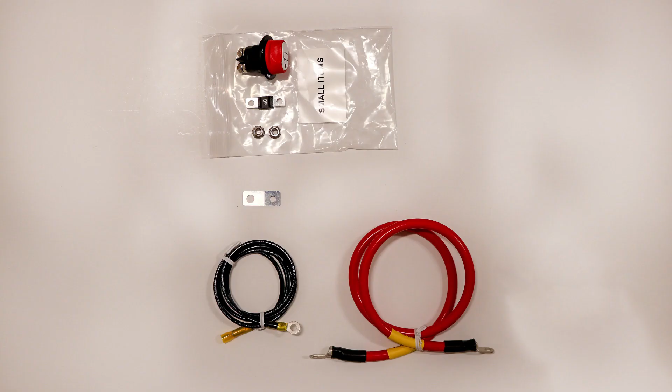In your electrical kit, you're going to have a small box that's your first step in the install process. This contains a few components: a black negative ground connection wire, a short red positive connection wire, and a small switch with a fuse included. We'll move into later the more specifics on how these all get installed.

Your second box is going to be the wires that we're actually going to run under the van. This pulls power from the seat base all the way back to that fuse block behind the wheel well. Your third box is your fuse block and all of your fuses, all the components to make the connections from your wiring harnesses that run power to all your components to your fuse block.

Your fourth box is going to be all of your end connections. This is all done after the wiring harness is installed and hooked up to the fuse blocks. This will be your very last step.

Your main wiring looms are going to be in the actual wiring harness box. You're going to have 4: the white and the blue run to your passenger side connections, and the black and the orange are your driver's side connections.

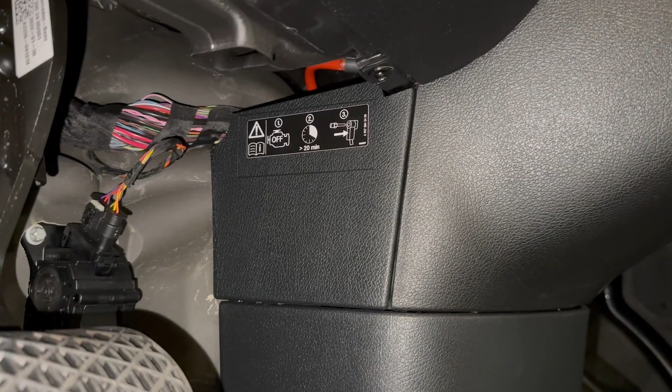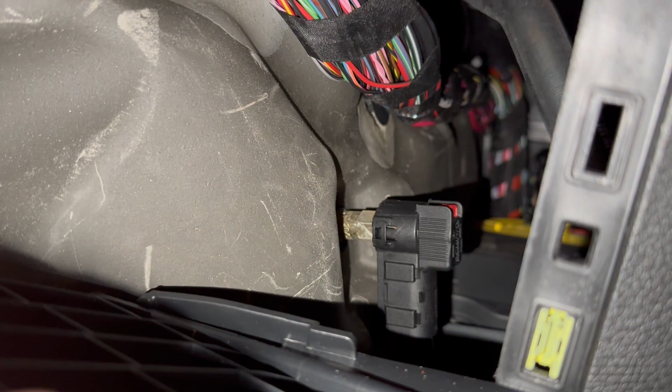The first and most important step of our wiring harness install is to disconnect the main ground for your van. This cuts power to all of the electrical connections that we're going to be messing with under the seat, making sure you're operating safely and not throwing any codes or creating issues with the electrical of the van.

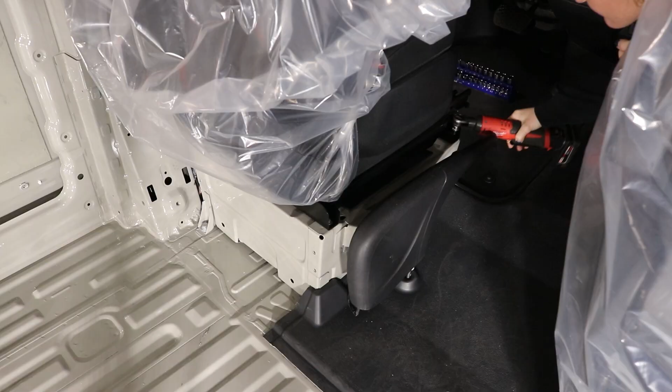This connection is housed under the driver's seat right up next to the gas pedal. There's a little cover you can pop off and then disconnect it using that red button on the top of the ground post. Once you have that ground disconnected, we're going to want to remove our driver's seat.

There are 4 bolts, 1 in each corner. You might have to move the emergency brake if you have one, or get a different socket size depending on which connection you're undoing, just because the seat can kind of be in the way. A good tip is if your seats are on swivels, you can move the seat out of your way to make it a little easier for yourself.

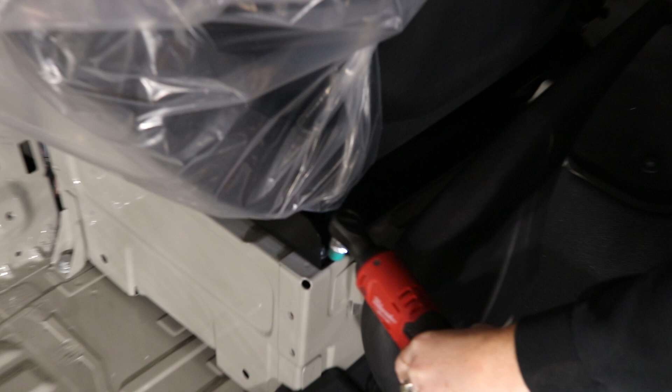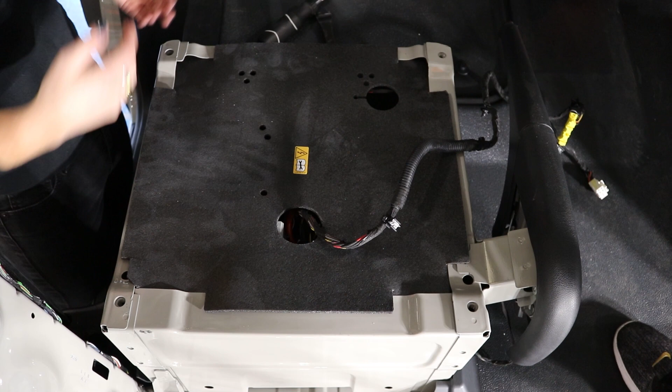Once you have your bolts removed, you're going to want to disconnect the 2 wires from under your seat that connect to the main wiring harness in that seat base. This will allow you to remove the seat safely. You can see here we've got them disconnected—they just have some little factory clips that hold them in.

Then you want to set those to the side and remove this little padded cover that's over all of the connections under the seat base.

Once you have full access to the seat base, we're going to want to move this connection bar out of our way. There's just a screw in each side that you can undo and shift that. We usually shift it towards the back of the van, kind of up and out of the way, to give us access to the connections underneath.

I like to always put my hardware back in the holes that they came from so that I know exactly where they are and I don't lose them. Otherwise, you can just keep a little cup on hand to keep all of your hardware safe and in one spot.

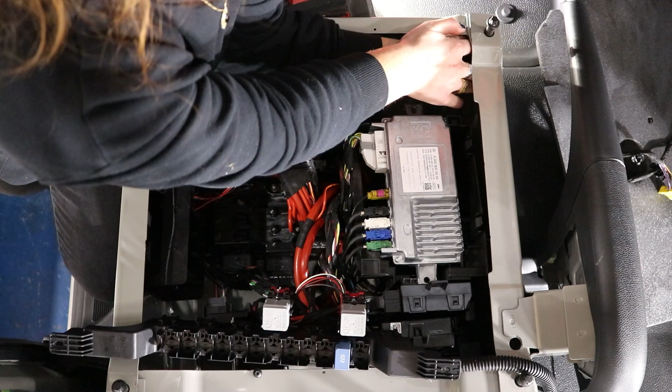We're going to move on to removing the little 12-volt outlet on the passenger side of the seat base. We're going to replace this with a switch. There's a couple plastic tabs on the back side of that outlet that need to be engaged to remove it. This can be a little tricky.

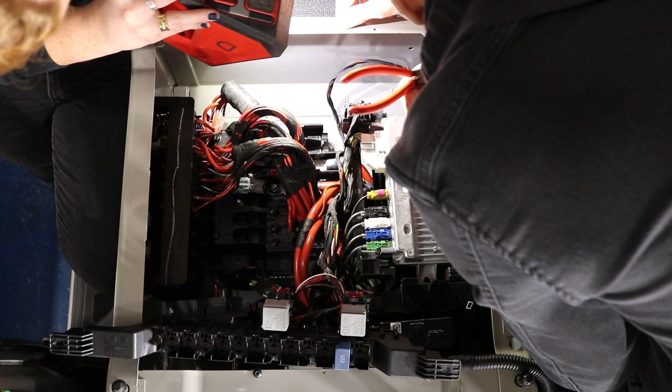We're not going to be reusing this outlet, so if you do end up causing damage to it, don't worry about it too much. Once you have it removed, we're going to open up that hole a little bit.

You just need to open it up by about 1/8 of an inch or so to allow our switch to fit into that hole. You're going to want to use a large step bit to make this hole.

Once you've test fit your switch, you can go ahead and deburr the hole and apply rust prevention.

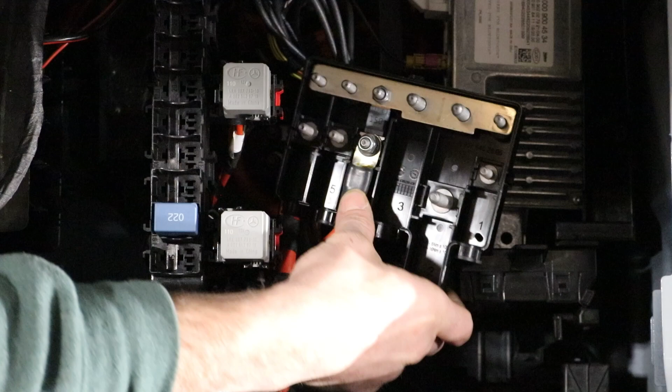We want to make sure to treat that exposed metal so you don't have any rust form down the line. The first thing we're going to show is the connection to an auxiliary battery. This is only if you have a factory auxiliary battery. If you don't, you can skip past this part to the section where we connect to the main starter battery. But if you have an auxiliary battery, you'll have a little housing for a bus bar underneath your driver's seat base, which we show here.

You can pop that out of place, and then there should just be some plastic retaining clips for the cover on that, and you can pop that off. Then you can see here there's a connection on the far right side, and there's usually a factory fuse already, but there will also be an 80 amp fuse in your electrical kit that you can use.

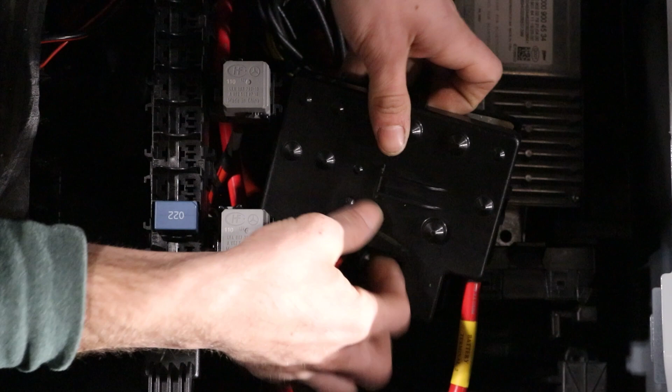So you're going to connect that to the far right post, and then using the cable that comes in your battery connection box - there's a 4-gauge cable labeled battery terminal on one end and seat base switch on the other - you connect the battery terminal end to the other end of that 80 amp fuse and tighten down your nut. After that, you can reconnect the cover to that bus bar and position it back into place in the seat base where you found it.

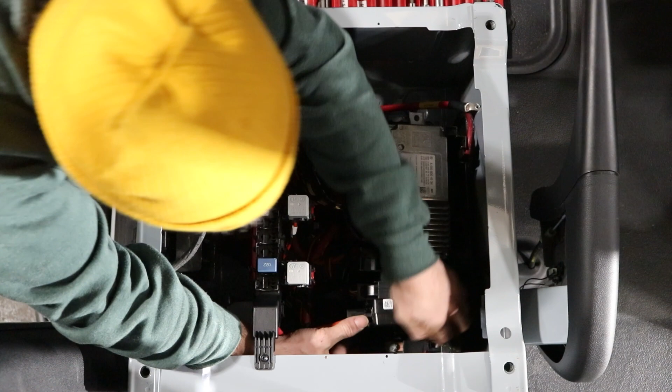After that connection's complete, take the other end and route it to the forward right-hand side of your driver's seat base, and we'll connect that to the switch a little later on.

If you don't have a factory auxiliary battery, we've provided all the parts to connect to your main starter battery for the van. Note that this is not approved by Mercedes, but it is the only way to hook up to your main van power to power the rest of your kit.

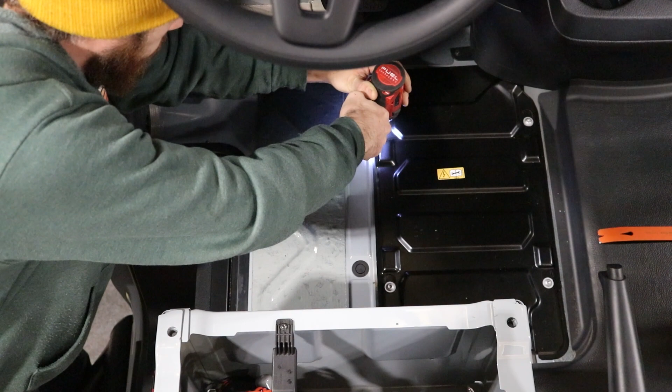To do this, we're going to go underneath your driver's seat footwell and remove that rubber cover first to gain access to the battery. Once you've done that, you're going to want to remove 4 bolts for the cover plate and make sure to put those in a safe place.

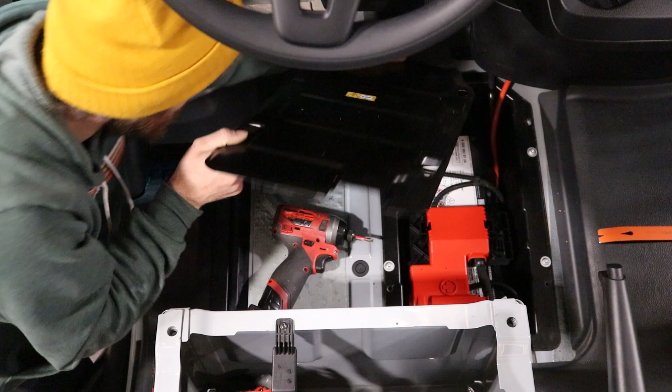I like to put them back into the holes they came from so I don't lose track of them. Once you've done that, the battery will be exposed, and there's a little housing on the positive side of the battery. You can see here we pop it out of place. This is going to be another protection from Mercedes.

This has a cutoff from the factory so that you don't drain your battery all the way down connecting anything to it. You still want to be really cognizant of not using too much power because it will drain it pretty low, but it will cut off power to your kit before your main battery is totally dead.

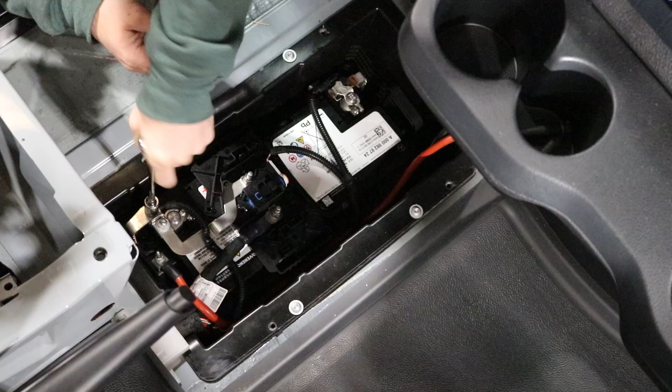Once you've located that housing, you can disconnect it from the main battery and pull it out. You're going to use that same cable you would have used if you had an auxiliary battery and that 80 amp fuse as well. We've put it onto a bench here so it's a little easier to see.

Once you've removed the plastic housing from the main battery, we're going to install a shunt, which is basically going to allow us to transfer power off of that main bus bar to another post. The shunt comes in your battery connection kit from Adventure Wagon, and there will be 2 holes in it. The sizing of the hole determines which orientation it goes, and it's going to be right next to a 125 amp MIDI fuse from Mercedes.

Once you have your shunt in place, you want to tighten down the nut on the main bus bar and then connect the 80 amp fuse to the other side, which connects power from the shunt to our cable. After you have the 80 amp fuse in place, connect the battery terminal side of your 4-gauge cable from your electrical kit to the other side of that 80 amp fuse. There will be a little spot in the plastic housing that routes where that wire will be.

That's a good tell that you've got everything in the right spot. After you have everything connected, you want to tighten down all of your nuts and make sure those are nice and secure. Then we can reinstall this housing back onto the positive terminal of your battery.

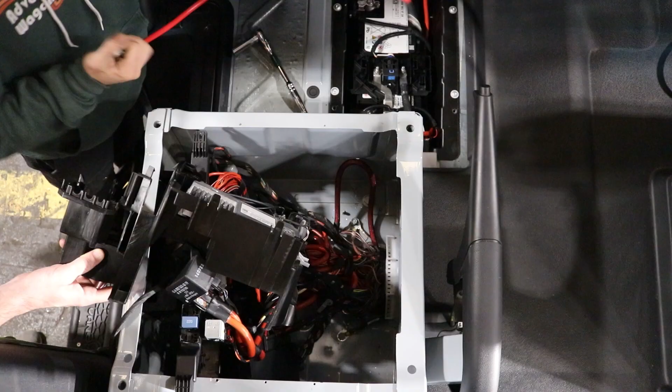After you have the battery all reconnected, you can put back on the cover plate, and then route your cable underneath your driver's seat base. There's a plastic housing on the right side of your seat base that can be removed if you're having trouble getting the cable inside. You need the other end of that connection cable to end up in the forward right-hand corner of your seat base. There's a factory outlet there that we're going to replace with a switch to connect to the rest of the kit. Now we're going to move on to installing our switch and making those connections.

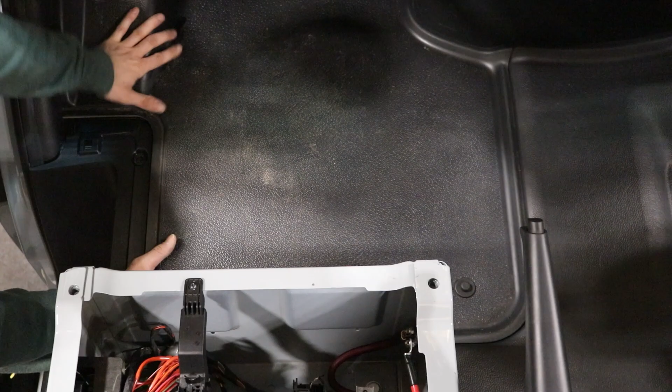Which post you're connecting to here doesn't matter. This is just an on-off switch for our positive connections. You don't have to tighten this down all the way yet either. Having it a little bit loose and allowing yourself some wiggle room in terms of the wire placement is kind of nice once you've got it installed. Then we can tighten it up all the way once everything's in there and connected.

Put that wire through the hole that we made in the side of the seat base and thread that collar over the wire, then reinstall it to the back of the switch. This is going to secure it to the side of the seat base and keep it from going anywhere. We found that having the wire come towards the back of the van off that switch is the easiest. We're going to have both connections actually run in the same direction.

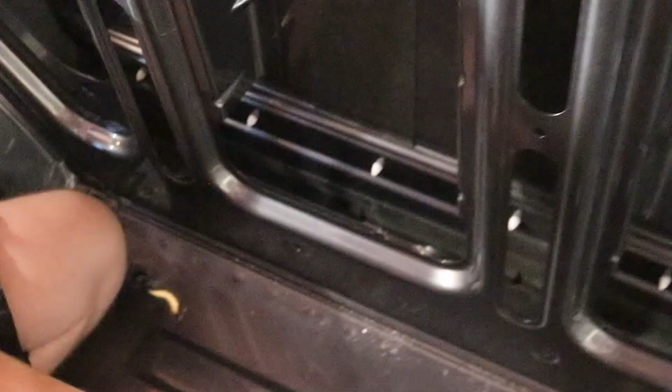After we've connected our main battery cable to our switch, we're going to move to the back of the van so that we can feed our positive cable from our fuse block location forward. In order to do this, we're going to need to drill a 1 3/8 inch hole through the bottom of the van. So you can see here we're showing that placement.

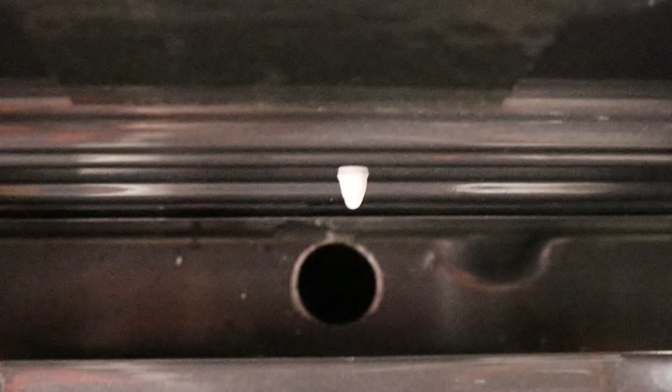There's a little corrugation in the sheet metal inside the actual van wall. Your hole is going to be just after that. There isn't a super precise location - we basically just want our wires to come out near this plastic cover underneath the van, which we'll show shortly. Once you've located this position, you can go ahead and drill your hole. Just make sure it's centered forward to back inside that van cavity. After you've drilled the hole, go ahead and deburr, rust prevent, all your normal steps for when we're drilling holes in the metal.

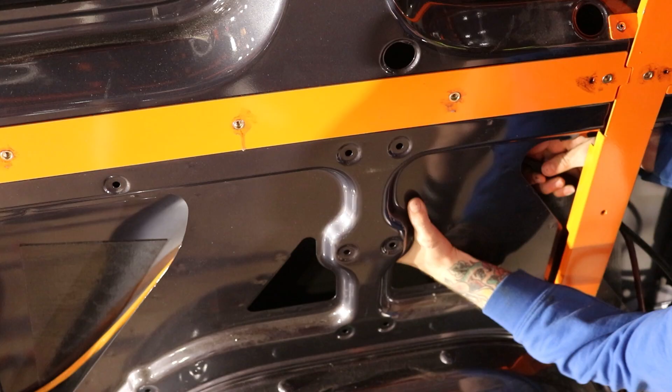As your rust prevent is drying, you can go ahead and feed your positive and negative cables back to our fuse block location. They're going to start near that hole you just drilled, and then it can feed up over the wheel well. It's best here to feed inside the corrugation of the van instead of tucked right on top of the wheel well. We're going to use some zip ties later on to secure these cables as well to make sure they don't get pinched in between the pieces of metal and cause shorting out issues down the line.

Go ahead and just feed those back. Keep it pretty loose for right now so you have a little bit of slack to move things around as needed when we're running cables forward and back. You a lot of times have to shift where things are positioned as you go through the process. The bulk of the positive and the negative leads are going to run under the van. So after you've got one end in that bay where the fuse block is going to live, all of the rest is going to feed through the hole that you drilled down underneath the van.

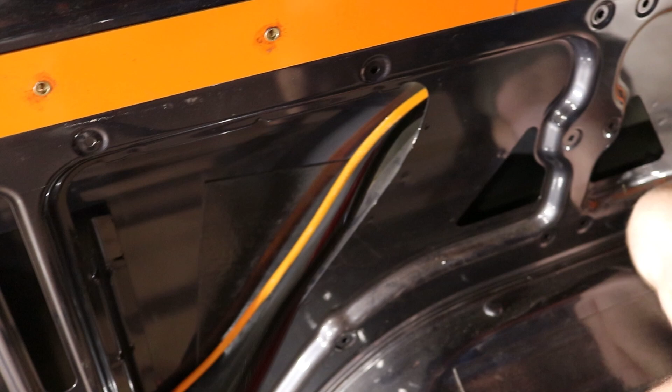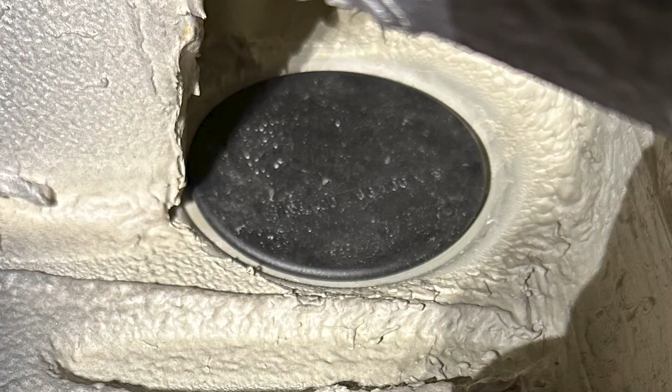Before you feed the cables through the hole to underneath, you want to feed on a little plastic grommet that's included in your electrical kit. This is going to protect the cables from getting cut or snagged on the sheet metal of the hole that you drilled. After you've passed your cables underneath, you can pop underneath the van, and there's going to be this large plastic cover tucked underneath the sidewall, right underneath where you drill your hole, so forward of that driver's side rear wheel well. It's just a black cover. It can pop right out - it's just press fit into place.

So we're going to pop that out and actually drill 2 small holes in it that are going to catch the corrugated sheath we're going to use to protect the cables running underneath the van. You can use your plastic corrugated cover to make sure your hole is the right size. You want these holes big enough that it can pass through, but not so big that it's going to fall out.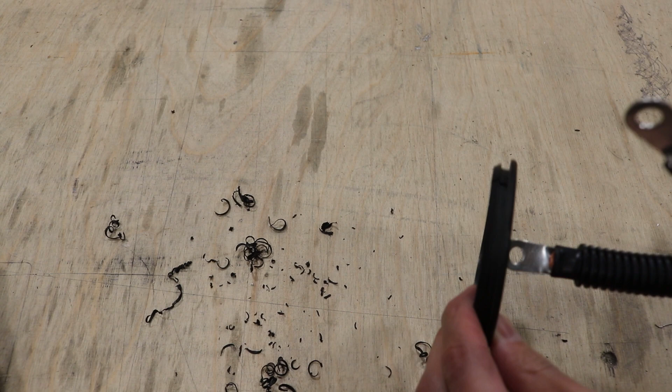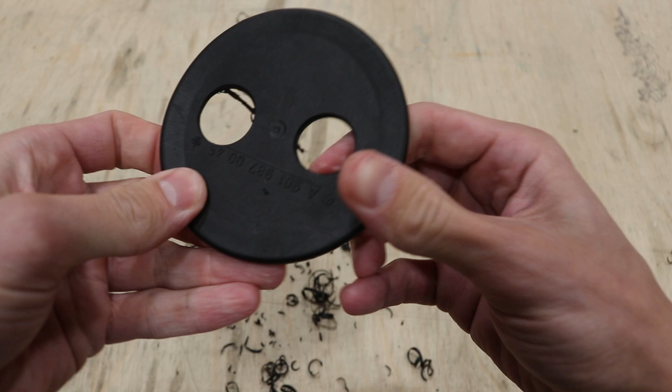So we use a step bit here. It ends up being about a 1/2 inch hole, but I would just go little by little and test fit as you go until you've got a nice tight fit for that plastic corrugation.

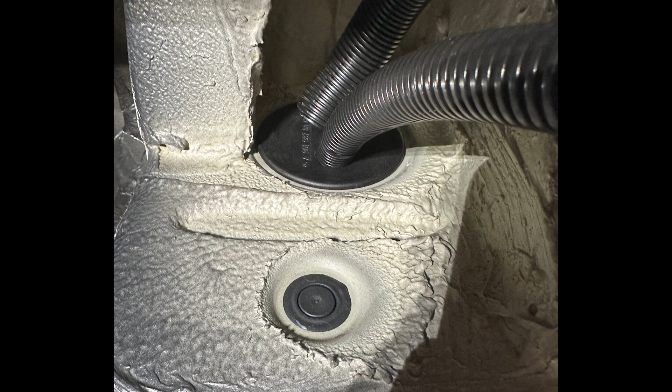The corrugation does have a split down the middle, so you can feed it on after you have your cables run. It's a little easier to feed the cable through the corrugation instead of through the split. So I would go ahead and feed it through and leave some slack on the end before cutting it to length. Then you can feed your positive and negative cable through that plastic cover you pre-drilled the holes in, and pop the cover back into place in that factory hole.

After you have the plastic cover reinstalled, the other end of your positive lead is going to run all the way forward in the van to your driver's seat base. There's a rubber gasket underneath your driver's seat that has a little zip tie on it. You can cut that zip tie to feed the positive cable up into the seat base.

This cable is going to connect to the other end of our switch that we installed earlier on. It's the same switch that our positive battery connection is connected to on the other post.

After you have your positive lead connected to your switch and your plastic sheathing run all the way along your positive cable, you can go ahead and reinstall that zip tie on the rubber boot. It's important to make sure this is as sealed up as possible because it keeps any moisture or debris from getting into your driver's seat base as you drive down the road.

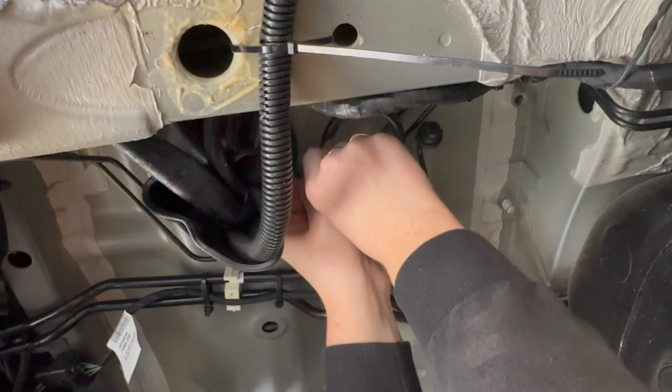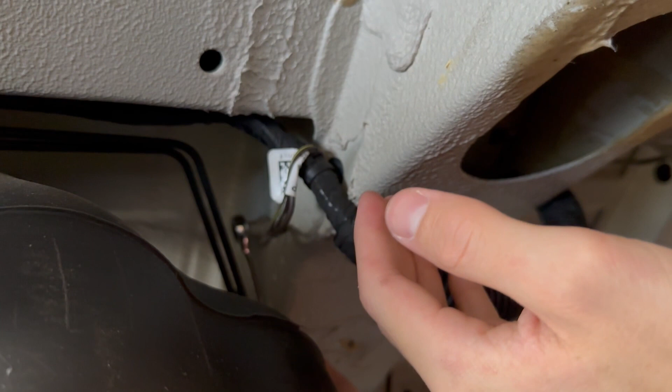After your positive cable is connected, we're going to move on to the negative, so this is our ground. Your van's going to have a factory ground underneath, kind of towards the middle of the van. It's often tucked underneath your gas tank.

There should be a few other factory components already grounded on this post, so you can see some other wires coming into it. It's a little hard to show in video, but it's tucked in the center of the van. You want to take off the factory nut holding the current grounds on there, add our negative lead onto that same post, then reinstall your nut and tighten it down.

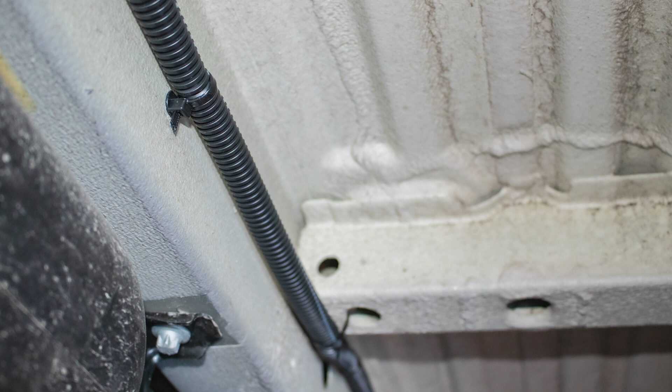After you have your negative cable connected to the factory ground, you can add the corrugated sheathing onto your negative cable as well and cut it to length.

After both your positive and negative are connected, we're going to go ahead and zip tie both these leads onto the sheet metal of the van just to keep it safe and out of the way from catching on anything or interfering with any of the main van components that live underneath.

We're going to move on to routing all the individual leads for the different components in the kit. You're going to have 4 main harnesses and then 1 smaller additional harness for our lights, which we'll show later on. But we're going to start with the blue harness. This is going to be a couple of our passenger side leads. We're going to have an outlet and a USB on this lead.

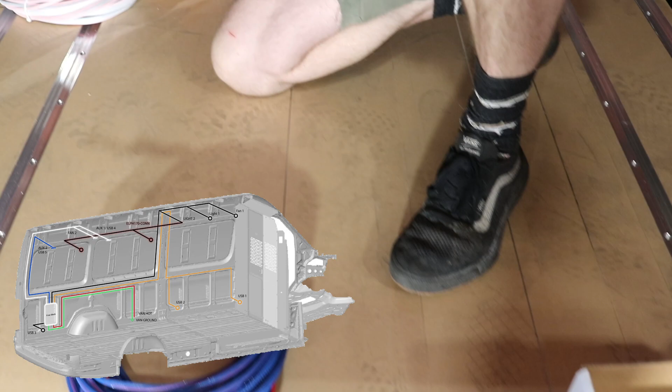We're going to start all of our wiring in that rear driver's side section where our fuse block is going to live. So often it's easier to drop the main part of the harness down from above the wire chase A-frame piece and through the wall down into that lower bay.

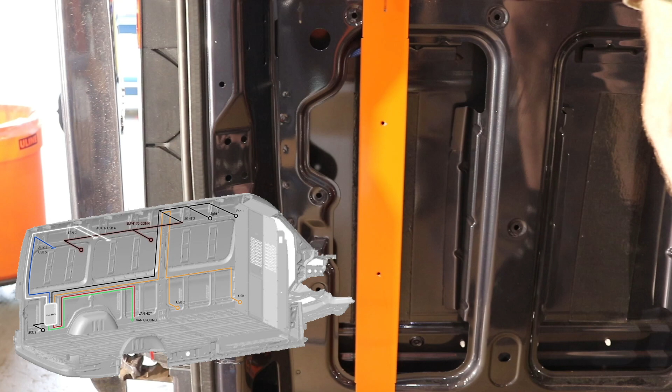It can be tricky to pass it the other way, like going up, just because of all the different breaks in the harness. So you can see here we do this in chunks, going through one part of the bay and then the next. This just makes it easier to ensure the harness doesn't get snagged anywhere inside the wall. There's a lot of pinch welds and stuff like that that are easy to get the wiring stuck on. So just go slow here, and occasionally it will pop out in sections where you don't intend it to. It might take a couple tries, especially in this very rear section.

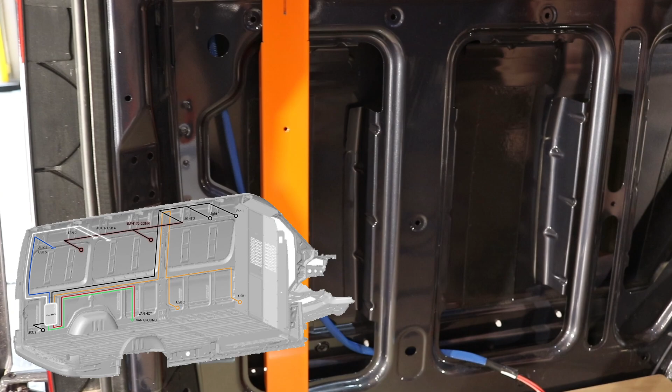It's easy to get the cable into the D pillar instead of the actual driver's side bay. After you've passed it down, make sure you have enough slack to reach the last, largest opening in the corrugations of the van.

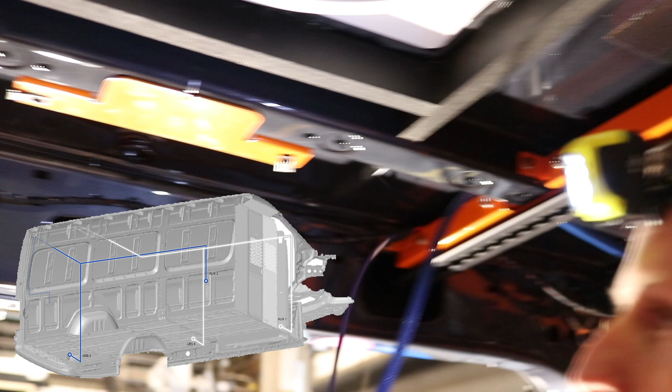Then we move on to the individual leads. We pass the blue lead over top of our ceiling bracers. It's really important to make sure you're going over the top of the track and the A-frame. Your first lead will drop down similarly to how we did on the driver's side, up and over the wire chase and down into that lower bay.

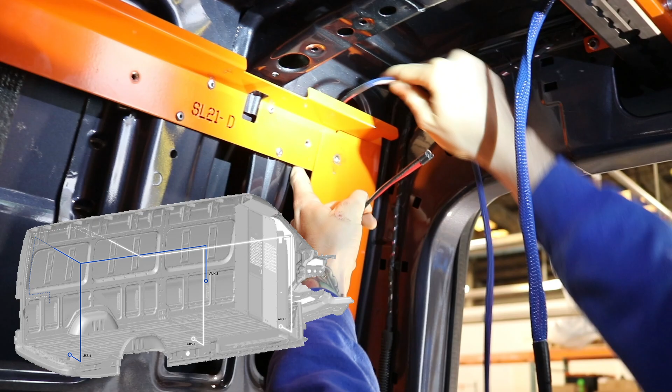This is going to be your USB 5 lead. There should be a label at the end of that lead to show you exactly which cable drops all the way down.

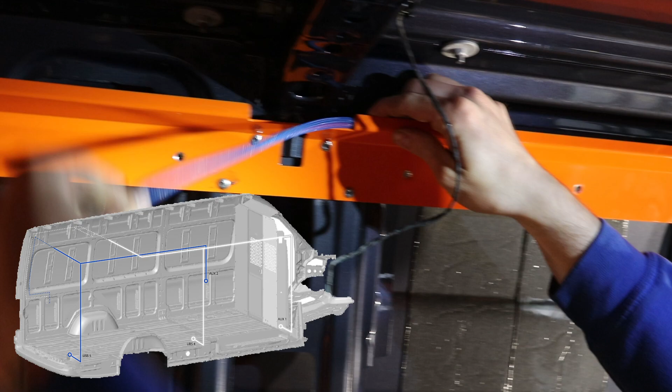After you've dropped that one all the way down to the lower bay on the passenger side, the next lead we run is on that same blue harness, labeled aux2. This is an optional lead—there's no actual use for it in our kit, so it's just an additional 10 gauge wire you can use for whatever you need. We tuck it in the top wall section behind the panels, running it along our wire chase, then drop it behind into that wall bay and coil it up, attaching it with a bit of hush mat to keep it from rattling inside the wall.

The next loom we do is our white loom, which is for more passenger side components. The main part of the harness drops down through the wall just like we did with our blue harness, following the same route and ending up in that lower wall bay where our fuse block will be mounted later on.

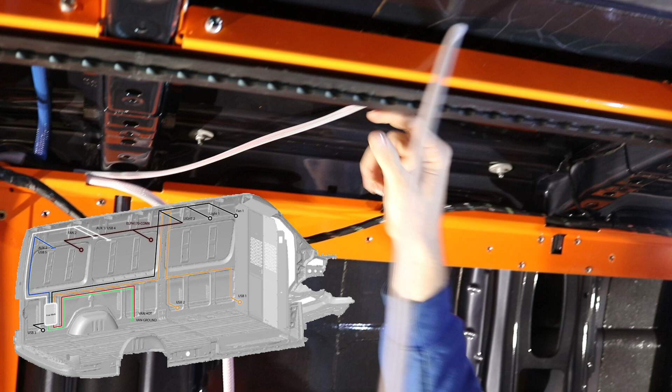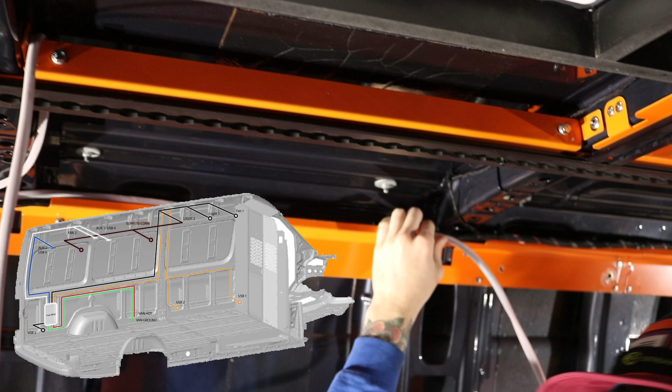After dropping that main part of the harness, we pass it over the ceiling just like we did the blue harness. The only difference is there's a fan lead on this harness that pops out in the center of your ceiling bay, between your two ceiling bracers. You can coil it up and tuck it under your ceiling bracer for now until you're ready to connect it to your fan.

The rest of the leads pass over to the other side. You have a USB 4 lead, which drops down to your lower bay just behind your slider door. This is for that set of outlets there.

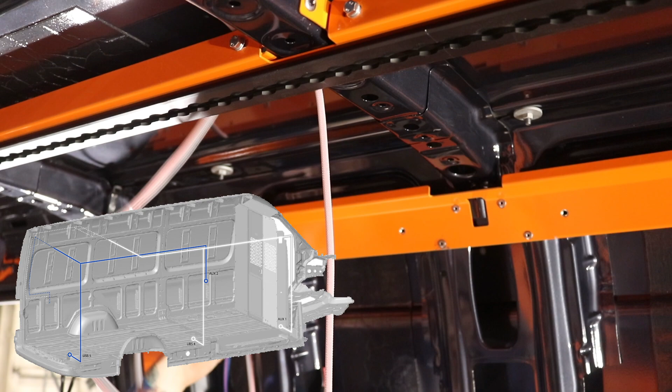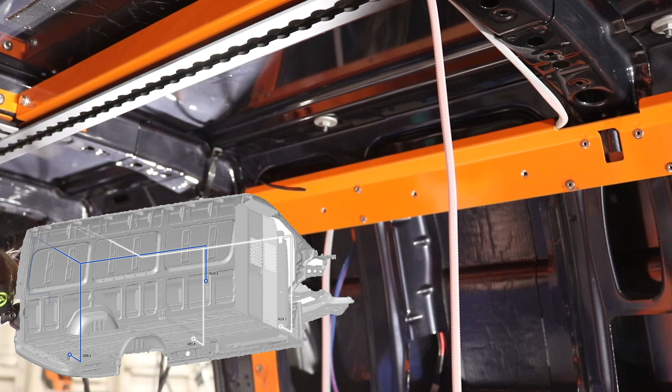Your other lead is aux1, which runs all the way forward on the passenger side along your wire chase and down your B pillar into your passenger side seat base. This lead is intended for a heater, so if you don't have an Espar heater, you likely won't use it—again you can leave it coiled either in the wall or in your passenger seat base for use later on.

Notice that your aux1 lead only has a positive cable, whereas the rest have a positive and negative, or red and black, cable. Your ground, or black cable, for your heater is actually included in your main wiring harness kit. It's a small black auxiliary lead because we ground it to the main battery ground underneath the driver's seat instead of to the fuse block.

For that aux1 lead passing all the way forward, we pass it up and over the forward ceiling rib just to keep it out of the way. You can use zip ties and things here too if it's sagging or causing you any problems.

We're going to move on to our driver side harnesses, starting with the orange loomed harness, which is for our forward outlets. To pass this down through the van, we start on the aft side of your C pillar, passing it through the wall behind your A-frame and sheet metal.

Like we did in the back of the van for the blue and white harnesses, just aft of your C pillar instead, you pass enough slack all the way down to your lower bay so you can pass it down to that lower bay, but also back to the fuse block location where your white and blue harnesses terminate.

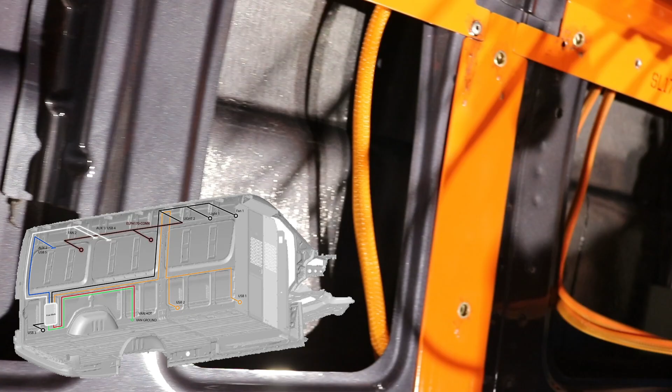After passing that section of the harness back, we go back to our C pillar, and in the top section of the harness, we pass it up and over the wire chase and back down. There's not a pass-through at that C pillar, so we have to pass it up and over.

Once you have it passed up and over, we're going to pass it back down through the wall. You can drop both leads down in the same spot, both on the forward edge of that C pillar and into the lower bay. Your USB 2 is going to stay just forward of that C pillar, and your USB 1 is going to pass forward to just behind your B pillar.

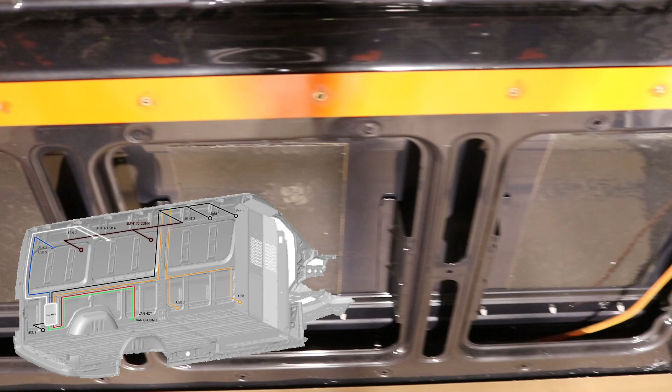Our last harness is going to be our black loomed harness, and again this is for driver side components. We're going to start with the same process as the orange harness by passing the main part with all of the lead terminations back down aft of that C pillar into our lower bay and back to our fuse block location.

There's going to be one lead that passes down that same route as the main part of the harness, which is our USB 3. This should terminate in your lower bay just forward of the D-pillar.

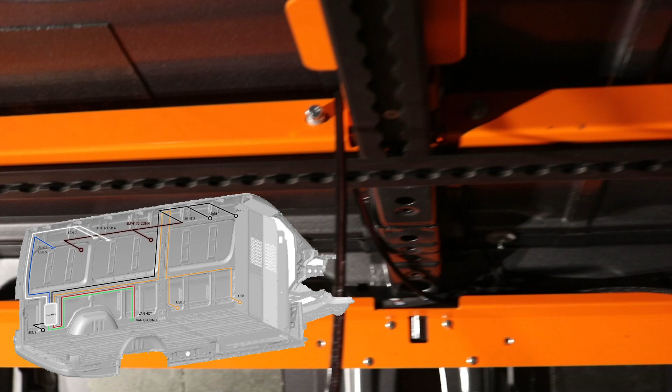The other leads branching off from this harness are going to be our lights and our fan. The light 2 you want to pass on the aft side of your C-pillar in the ceiling. You'll have a piece of track and A-frame on that middle section, so make sure it's aft of that track and A-frame piece so it can connect to your aft light harness. Your light 1 lead is going to pass on the forward side of that same A-frame and track piece in your ceiling.

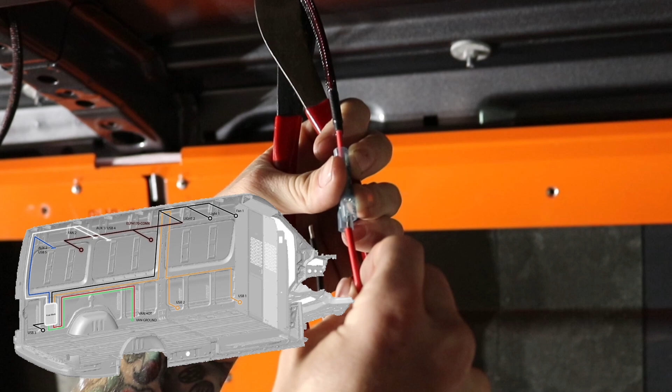Just leave all this loose for now. You can get a better idea later on how everything's going to connect and fit together, and having some slack to move things around can be really helpful.

While we're at this part of the light harness, you will also have a little smaller harness in your electrical kit called ELPH15-CONN. This allows us to connect our second and third ceiling panel light harnesses to our main cabin wire harness.

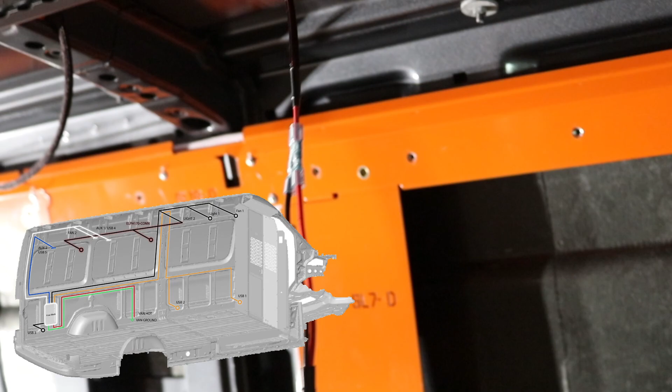So basically you'll have 3 branches on this smaller harness: one with a set of butt connectors connected, one with a Deutsch connector connected, and one with just the loose leads.

The loose leads we're going to pass up and over our ceiling ribs into the back bay of the van, so this will be aft of your second cross piece of A-frame and track.

You want to make sure that passes up and over, and the end with the Deutsch connector is going to live in your center section, between your 2 pieces of track. And then the one with the butt connectors is going to connect into your main harness.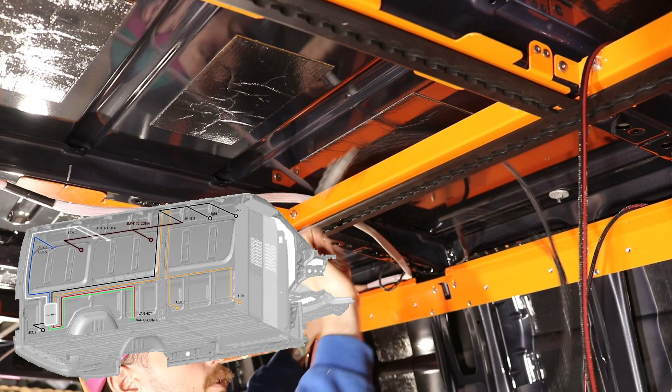So that light 2 lead from the main black wiring harness that we were running earlier, the lead that we passed all the way to the back of the van, for your aft panel lights, we're going to connect a Deutsch connector on later. You'll have a little baggie with 2 Deutsch connectors loose in it that you'll connect to that harness, which can plug in easily to the light harness in your aft panel.

When your light 2 is connected to your ELPH 170-CON, you can go ahead and run your light 1 lead into the forward section of your ceiling bay. This again just has to be forward of that piece of track and A-frame in your kit.

Your last lead is going to be your fan 1 on this black harness. This is going to pass into the same section that your light 1 will be. Again, just leave it loose and accessible so you can connect it to your fan when you're ready.

When your wiring harnesses are run, we're going to move on to showing how we make some of our end connections. You're going to have 5 different locations where we dropped those USB leads, so you want to make sure they're in the correct location to correspond with the outlet holes in your panels.

Once they're where you want them, we're going to go ahead and strip the end of the black and the red wire. Then you'll have 5 sets of what we call pigtails or splitters, 5 sets of 2 red and 2 black wires all coming into one butt connector.

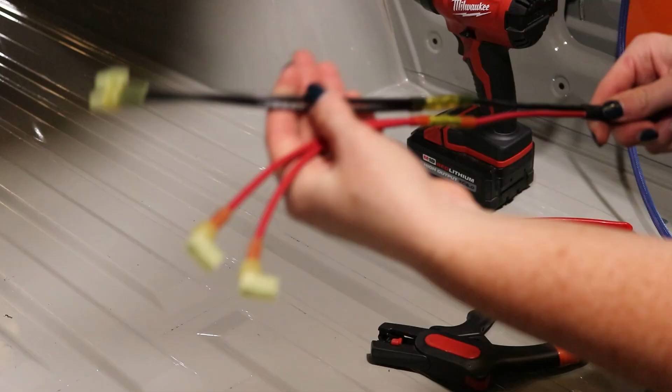So you're going to connect red to red and black to black here. This is going to give you both positive and negative connections for your 2 sets of outlets at every location. After you strip the wire from your main harness, you can go ahead and crimp on the pigtail and then heat shrink it to secure it.

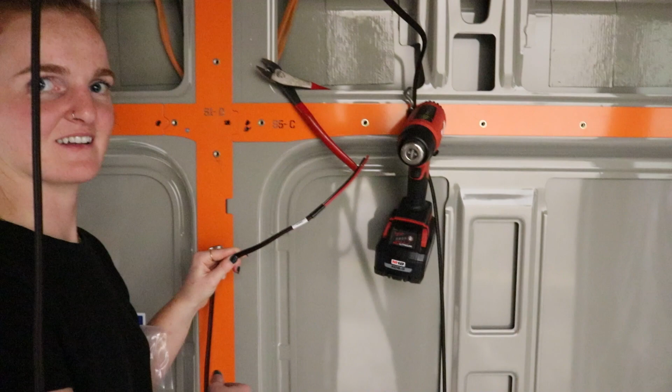The next connections we're going to show are your light connections. You'll have 2 sets of Deutsch connectors in your kit that we're going to connect to the light leads that we passed into our ceiling bays from our main wiring harness. It's really important that your wires are in the bay that you want them in before you connect the Deutsch connector, because they are pretty big, so you're not going to be able to pass those under ribs or A-frame or anything once it's connected. Definitely make sure you're in the right spot before adding these.

Same process, red to red, black to black. You're going to strip your wires, crimp your butt connector on, and then heat shrink it to secure it. In the 170, you will have an extension harness for your wiring or lights that we showed a little bit earlier in the video. Just make sure you're taking special care again to make sure that your ends are in the correct ceiling bay before adding those Deutsch connectors.

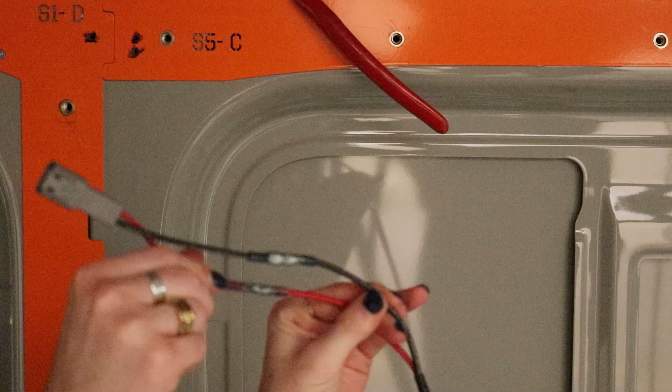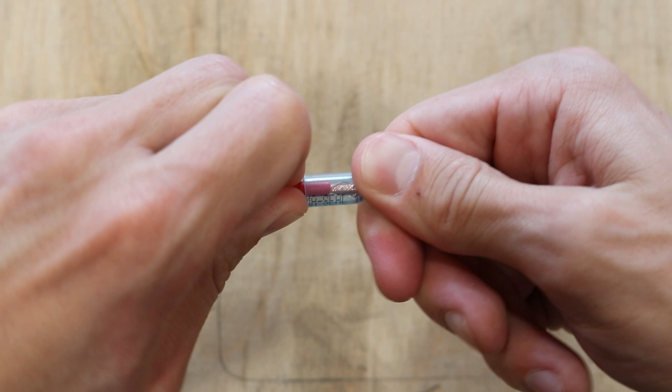We're going to move on to our main fuse block connections. In your wiring kit, you're going to have a fuse block connection box that's going to have all of your terminals. You'll have a mix of blue and yellow spade terminal connectors that we're going to use to connect to all of the ends of our wiring leads that will connect into our fuse block. The blue are for 14 to 16 gauge wire, and yellow is 12 to 10 gauge.

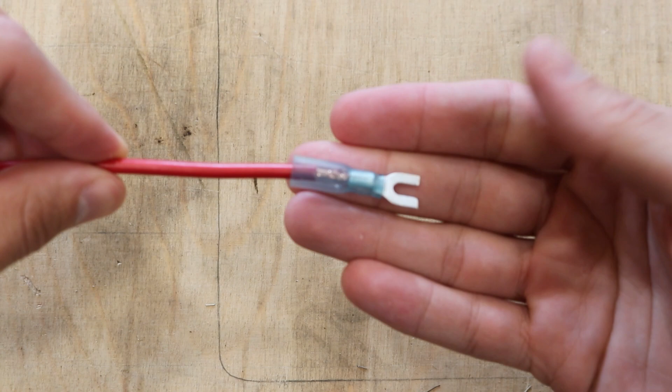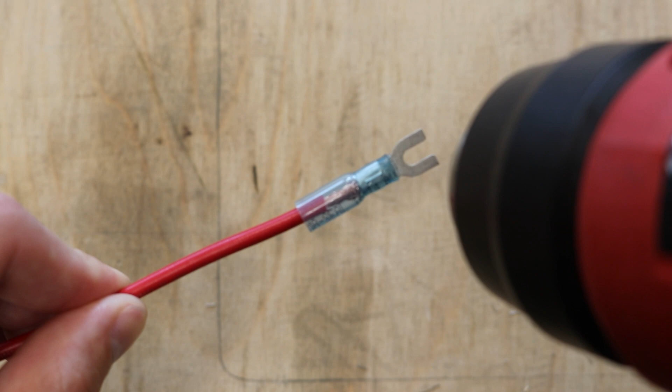Make sure that you're paying attention to the labels on your wires and then using the correct terminal connector for that wire gauge. This is the same process as our other connections that we made for our lights and our outlets. You want to strip the end of your wire, crimp it securely, give it a little tug to make sure it's on there good, and then heat shrink to seal it up and make sure the connection is really solid.

You're going to go through and do this for all of your end connections. I like to do mine all at once just so it's done, and then we can connect everything into the fuse block at one time. We're going to show an example on the bench of connecting each lead to our main fuse block. We're just going to show one connection here, and then we'll move into the van to kind of show it in real time. But you'll repeat this same process for every connection.

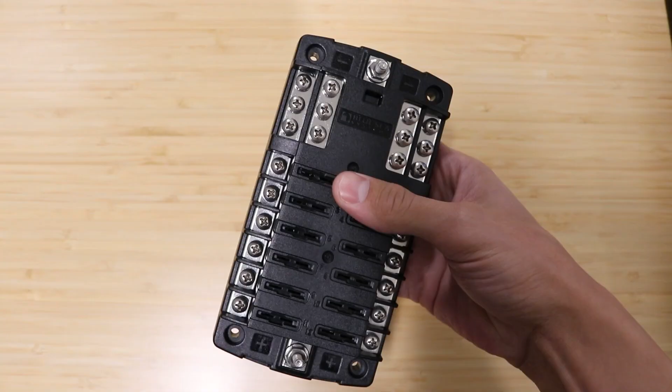You're going to have 12 positive connections on the outer edge of the fuse block. These are going to correspond with little spots where we'll put in our fuses later on. It's important to make sure you're paying attention to where you're putting everything and noting down your positions as you connect these so we can put our fuses in the correct spot.

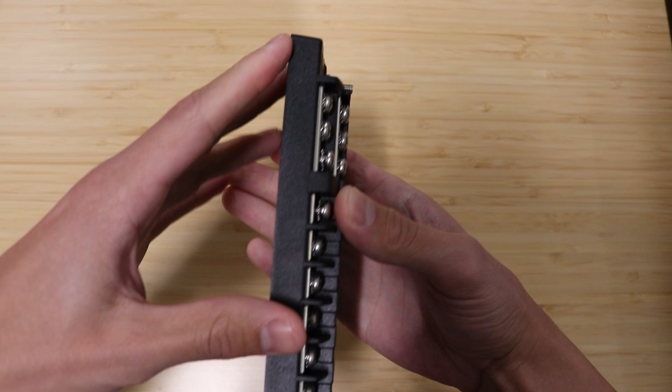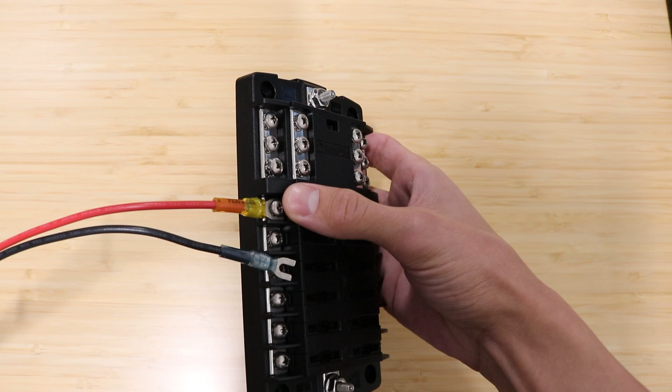You're going to make sure that you loosen the screw in the fuse block, not all the way, but enough so that you can slip that terminal connector underneath the screw head and the lock washer, and then you'll tighten it back down. All this will just be used with a hand tool, so a screwdriver, but you do want to give it a little tug when you've got the screw tightened to make sure that terminal connector can't slip out of place.

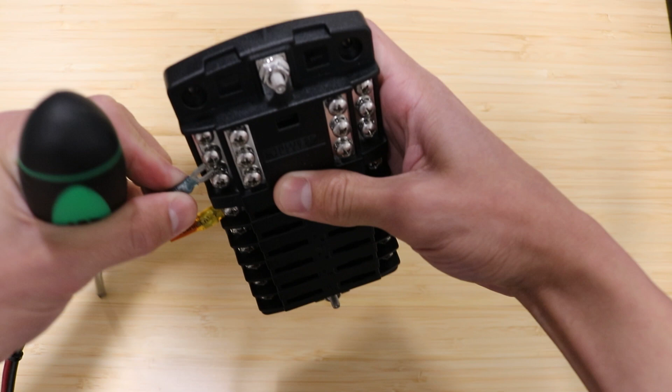I like to make sure that my negative connections, so your grounds, are all in the same order as my positive connections as well, just so it's easy reference later on if you ever have to replace any wiring or dig into an issue. You do this process inside the van, so you can see a little bit better here our installer going through and making all of his fuse block connections.

While you want to record what location each lead is on the fuse block, you also want to keep all of your leads from one harness on one side of the fuse block to make sure that your wiring's not getting all tangled and bunched up behind your fuse block plate when we go to mount it. After you've made all of your lead connections to your fuse block, we're going to move on to our actual fuse plate, we call it.

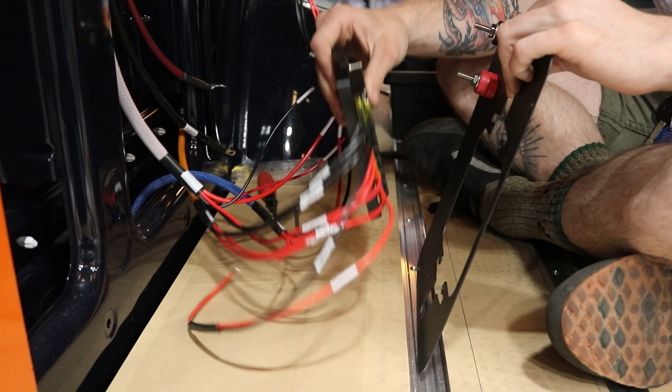So this is what's going to mount your fuse block and all of your electrical connections to the van body itself. In your electrical kit, you're going to have a positive and a negative post with nuts pre-threaded onto the bolts on the post. You're going to use those to connect it to the plate.

Your leads should be long enough to have either post in either position, but just to be consistent, I would keep your negative or black post on the top edge of the plate and the red one underneath. It's also really important throughout this process that all of your connections and bolts are tightened down really securely. We'll go back through at the very end and tighten them all up, but as you go, make sure you're securing everything well.

It's also important here, orientation on the plate, and if you're mounting to the back or the front, to make sure you're not going to interfere with the mounting of your panel later on. Just pay close attention to how our installer is doing it in the video. You can see here everything's mounting to the back side of that metal plate to make sure the front edge is flush and the panel can be mounted over top.

After you have your fuse block connected to the plate and then your positive and negative post also secured, we're going to move on to our first main connection wire from our fuse block. You'll have a wire that goes from the positive post on the bottom of your fuse block to that positive post that we mounted on the plate. You'll also have a negative connection cable that will do the same thing, but it'll go from the negative post on the top of the fuse block to the negative post mounted on the plate itself.

So we're going to add another connection to both the positive and negative posts from Adventure Wagon. You'll have your main positive cable that we ran underneath the van and back up through that hole that we cut in the van body itself. Run that through, and then we'll feed on our rubber boot that's included in your electrical kit over that main positive cable and the positive cable we ran from the fuse block. Thread that over, then secure both of those lugs to that positive post and tighten your bolt down.